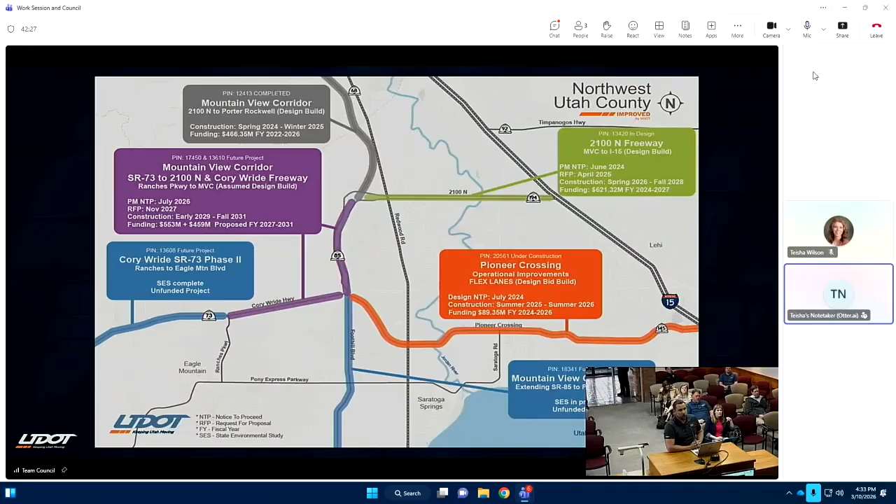For those of you that don't know, our program for Northwest Utah County consists of a series of projects. Some of you might know these very closely. The first one I'll speak to is the Mountain View Corridor project that we just finished in December. That project was from 2100 North up to Porter Rockwell. We were required to do that one first before we could start the freeway portions on Mountain View Corridor. We needed to make that connection. We were able to complete that project 4 months ahead of schedule and open it to the public right before Christmas. We're very excited to have that open and have that additional capacity between Salt Lake and Utah counties.

The next couple projects I'll speak to are 2100 North and Pioneer Crossing. Those are in our program, as well as the freeway portions of Cory Wride and Mountain View Corridor from 2100 down to SR 73. Future unfunded projects that will be part of our program are Mountain View Corridor South and Saratoga Springs, and Cory Wride Phase 2 out towards Eagle Mountain. Those are all freeway projects.

So as you can see on the map, we have several projects and a large investment in the area. The goal for our program, the Northwest Utah County program, is to provide that one-stop location for the public, council, or really anyone to find all the information on what's going on with these projects. So if you go to the website that's on the screen currently, you'll be able to drill down into any one of those projects to get additional details and schedule.

The first project we're going to highlight is Pioneer Crossing Flex Lanes project. I'm going to actually have my construction manager, Jeremy Bound, give an update on where this project's at and what's to come. Thank you.

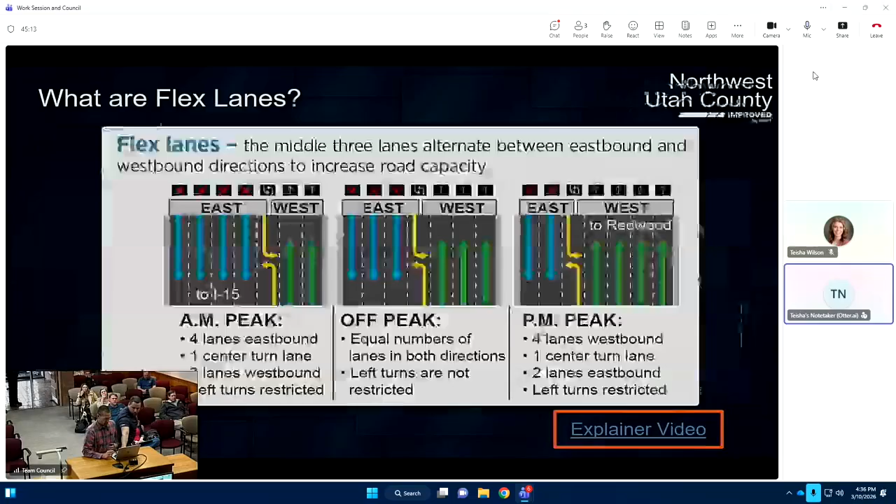Mayor, council, staff, Jeremy Bound with UDOT, Design and Construction Manager, part of the Northwest Utah County program team. So Pioneer Crossing, if you are in Lehi, you are probably aware of this and have seen it. We are under construction now and on schedule, looking to be able to, from Redwood Road to I-15, have the 3 lanes in each direction capacity later this spring, hoping May timeframe, and it's looking like the contractor is on schedule for that. Once we get that capacity built, we'll move to the next part of that project, which is adding the signals and such, so that we can do, as shown on the screen here, the flex lanes portion of that.

Schedule is to complete that portion of the project by the end of this year. So with that, we'll go from having 2 lanes in each direction currently to 3 lanes later this spring. Then with the flex lanes and those signals, we'll be able to shift during peak hours to 4 lanes in the peak direction and 2 lanes in the non-peak direction, then midday shift back to 3 and 3.

As shown on the screen here, I do have a video. I'm not sure it's going to work, so I probably won't jump over to that, but you can get it from the website that Andrew showed earlier if you want to see that video.

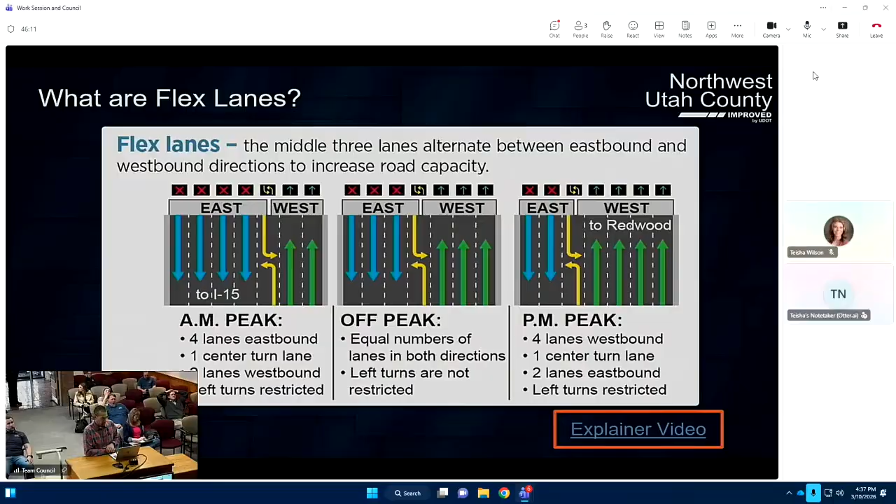As I said, the major improvement is the flex lane system between I-15 and Redwood Road. We'll also be adding additional westbound lanes between Redwood Road and the Mountain View corridor, so that in the evening when there's 4 lanes coming from I-15, it doesn't just go from 4 to 2 and continue to back up. There are actually lanes to capture that traffic and keep it moving through Lehi and off into the further west.

That project will start soon. We should be advertising for the contractor on that phase of the project in the next couple of weeks, and that one is also scheduled to complete by the end of the year. So all work on Pioneer Crossing should be complete by the fall of this year.

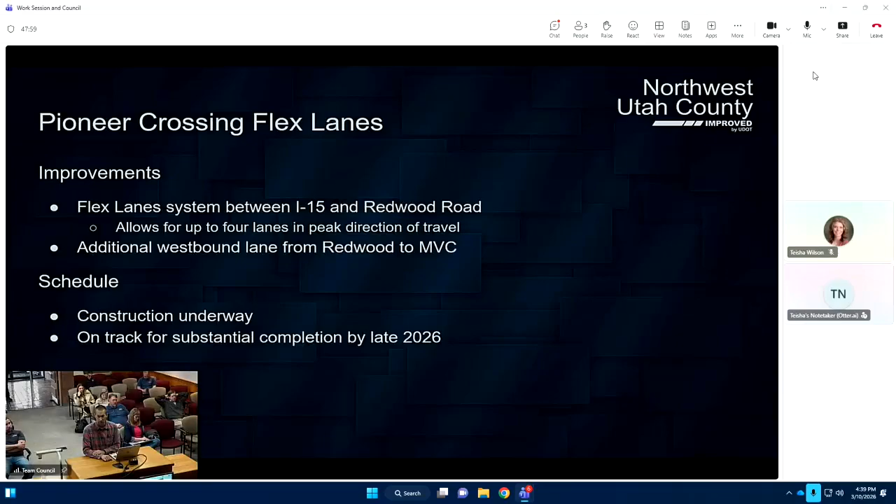Construction's underway and we're on track for that substantial completion. I'll give it back to Andrew for the rest of the update. Thank you.

The only thing I might add to what Jeremy said is the reason we went with the flex lanes concept is we're able to provide that capacity within the existing footprint of the existing corridor, and that's the largest benefit we could have. We're using the existing pavement out there. The contractor is actually recycling a lot of the concrete they've pulled out to install drainage, and recycling that back into the pavement section as well. So we're reusing a lot that's on that corridor, with minimal impact. We're not buying a lot of additional right-of-way or acquiring additional properties there. That's a huge win for us on this concept, and it really works well with the way traffic flows in this corridor.

Is there any questions on that real quick? Yeah, I have a question.

I see that the lanes look like they're going to go down. From what I understand from our streets department, a standard lane is 12 feet, and it looks like some of them say 11 to 12 feet. So I'm wondering what the speed limit is going to be, because from my understanding, with smaller lanes, it's typically a little bit of a lower speed, just to control the car.

What is your prediction? We are planning on reducing the speed limit on the corridor to account for there no longer being a shoulder on the edge and the reduced lane widths. So we are reducing that. Is it 40 or 45? We set the construction speed limit, but that speed limit will maintain once we're done at 40 miles an hour.

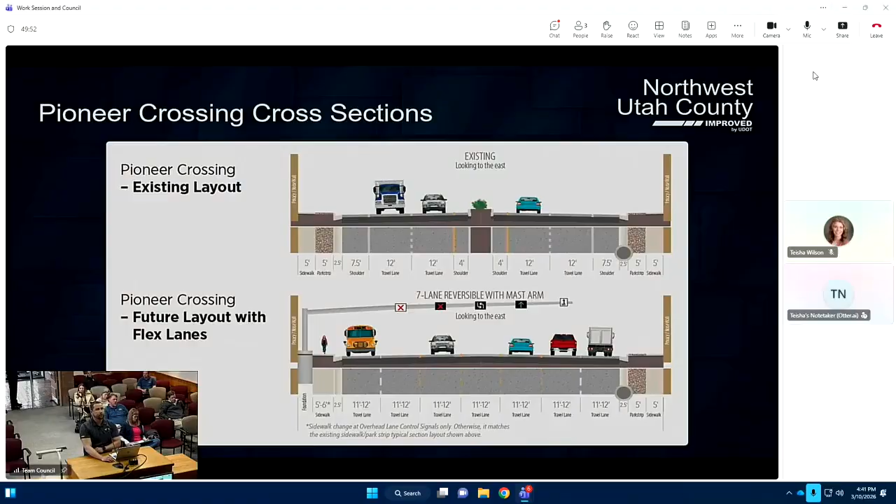Can you go back one slide? Here? Maybe one more.

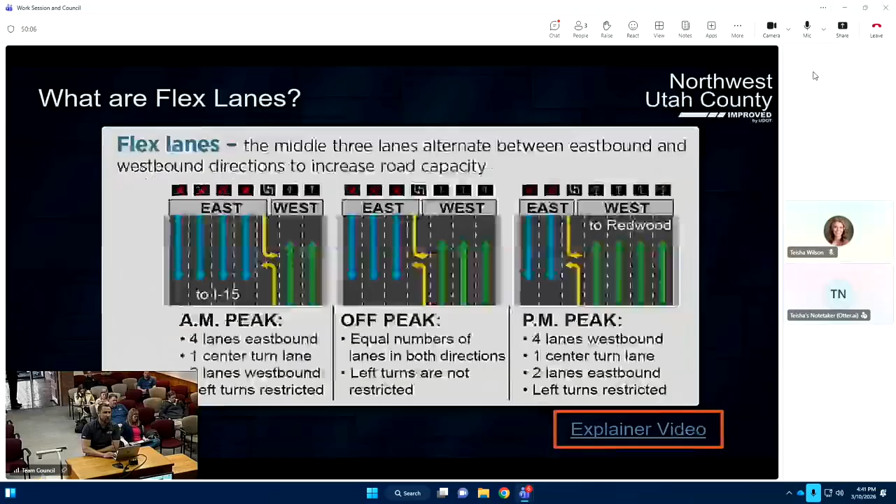So at what point, the one with the map showing, from Mill Pond Road to I-15, when is that planned to be modified? We will be modifying that as part of our project to line that up for the additional lanes, continuing that over to I-15. There will be some median modifications and right lane assignments getting ready to go into that flex lanes corridor.

And for the lighting, there's been some questions by the public on how dark it is, especially when it rains and everything reflects and you can't really see. What type of street lighting is going to be installed? Will it be LED, low profile, and will that be installed before those lanes open? A lot of the lighting infrastructure will be in line with the gantries we're putting in for the lane assignments, and that'll increase the lighting on the corridor. That'll all come online when we have that infrastructure in place.

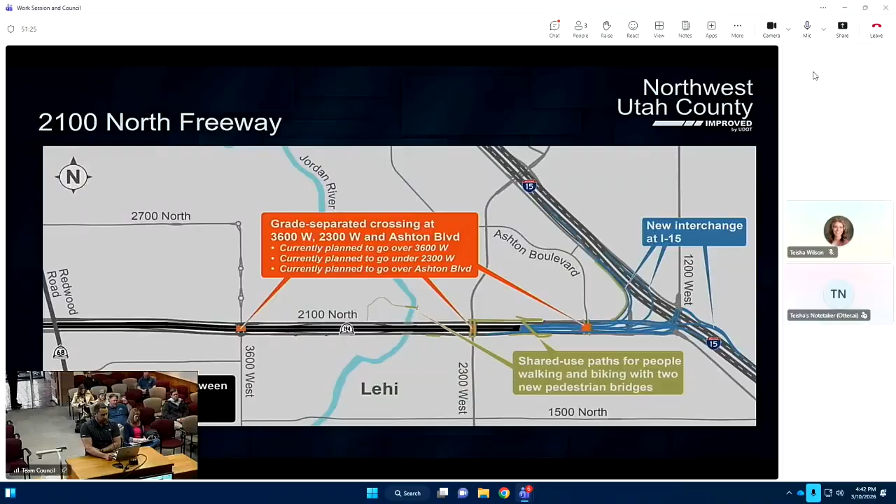Next, 2100 North Freeway. We're ready to roll. Our construction crews will be beginning some work along the corridor tonight, with some lane restrictions as we start making access into that median to prepare for work.

The first areas of work you'll see are near the river. We've got to do some work in there in preparation for the new freeway bridges crossing the river.

Before the increased flows happen in the Jordan River, we've been working in coordination with the River Authority to make sure that work is done so we're not impeding any flows from Utah Lake into the Jordan River and points north. So that's going to be a major coordination point with our contractors.

We'll also be starting to work on grading out that median area in preparation for the freeway. But yeah, work starting tonight.

So the concept for the 2100 North Freeway, you saw some of it that we completed in the Mountain View Corridor project, is lining that up for that freeway portion in the middle between the existing frontage roads. That'll continue where we left off, between Redwood and 3600.

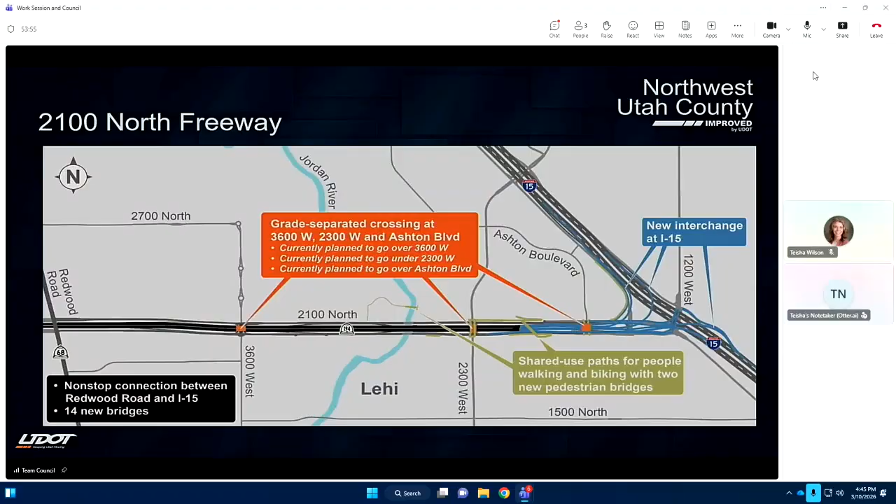There are two co-op agreements that we're looking for approval from the city on. The first one is a tri-party agreement between UDOT, Lehi City, and Utah County, in coordination with major stakeholders and the city. We will be constructing a trail connection from the future Holbrook Park, the city park behind the hospital, to the Jordan River Trail as part of our project.

This will be a pedestrian bridge that the city will own and maintain, but it provides a connection between the already heavily used Jordan River Trail corridor and the park facility, connecting across the river for those neighborhoods around the UTA station and over towards the hospital.

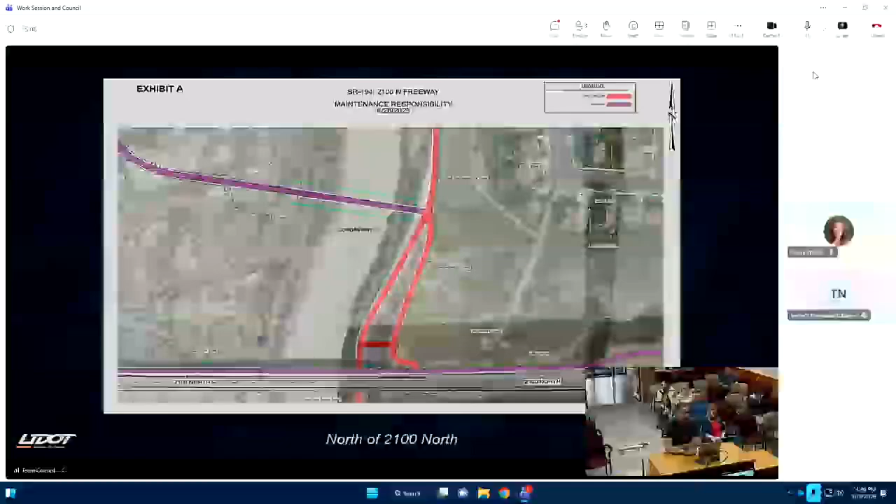We are also building, as a betterment, the trail through the park property for the city as part of our project. That covers the main points of that cooperative agreement. It's a tri-party agreement because there are connections between the Utah County Trail System, the Lehi Trail System, and UDOT right of way.

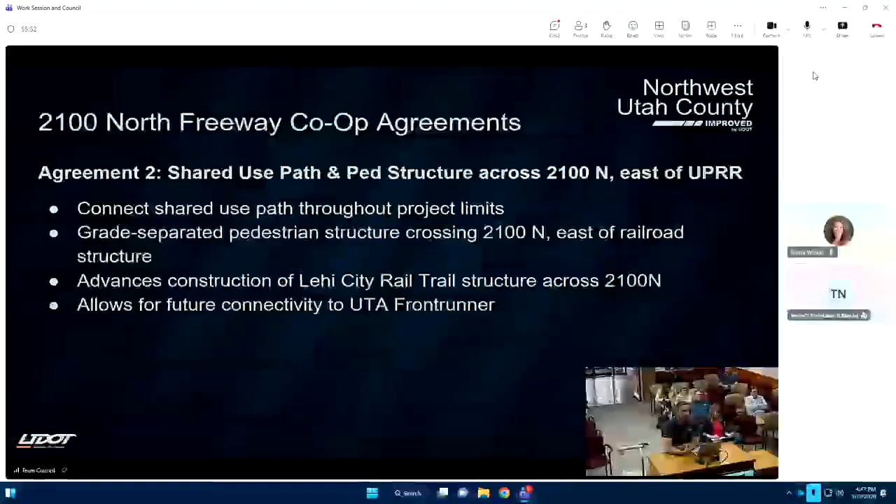The second agreement we're presenting is a co-op agreement for the rail trail bridge east of the UPRR tracks, in coordination with staff and the future project to bring that rail trail from the UTA station down into downtown. As part of our project, we're building that structure for the city.

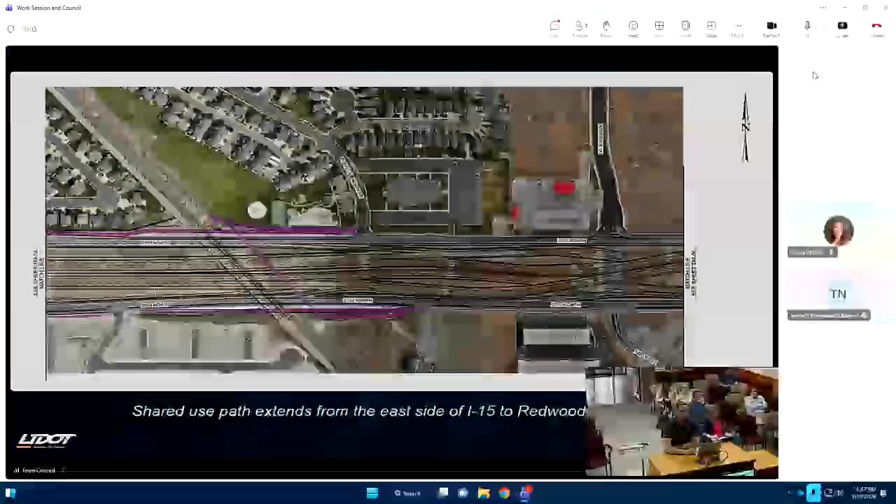Shown here, it connects from the skate park over to that south side and connects into that future improved trail. I believe the city has funding and is constructing improvements there in the coming years. So those are the two agreements, and some of the main coordination points we've done.

We've done a lot of work with major stakeholders in the area, the Garv properties, the Hadco property and access to their yard, as well as access in and out of the hospital. We've been working closely with the hospital to make sure that anything we do, even during construction, isn't impeding emergency services getting in and out, as well as flight coordination with the helicopters so that as we have cranes in the area, we have close coordination. They're aware of what we're doing, and we're aware of what they need from us.

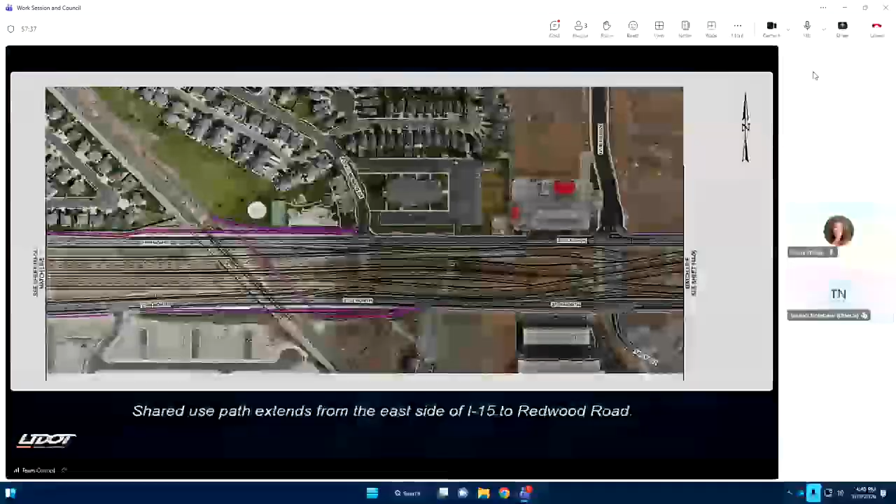So we're excited to start this project. General schedule, we're starting now, and we plan to have this completed by the end of 2028 — a 3-year project. There's a lot to do here, and we've been working closely with staff. I've got to commend the Lehi City staff for their coordination with us and their willingness to work with us on a lot of things. It's been a great partnership, and we wish to continue it over the next couple of years.

Upcoming for our program, we do have a funded project that we'll start as soon as we finish 2100 North, and that will be the Cory Wride and Mountain View Corridor freeways. We will continue from 2100 North down to 73, build a system interchange at 73 and Pioneer and Mountain View, and then continue that freeway and frontage roads out to Eagle Mountain, which will help pull a lot of that regional traffic out of the local systems and into a freeway system, vastly different than what we're experiencing today.

If you have any questions or would like to stay up to date, please visit our websites, and there's also the Facebook group where we'll be posting construction updates, lane closure updates, and really anything you need — you should be able to get it between those two sites. So if there are any questions, I'd be happy to answer.

I've been told you're redesigning the interchange between 2100 North and I-15. Is that correct? Yep. Okay, as part of that, are you going to reevaluate the sound study? Yes. The noise study we completed during our environmental reevaluation was based on the concept we had at the time, but our contractor, selected based on best value, has a slightly different design for that interchange.

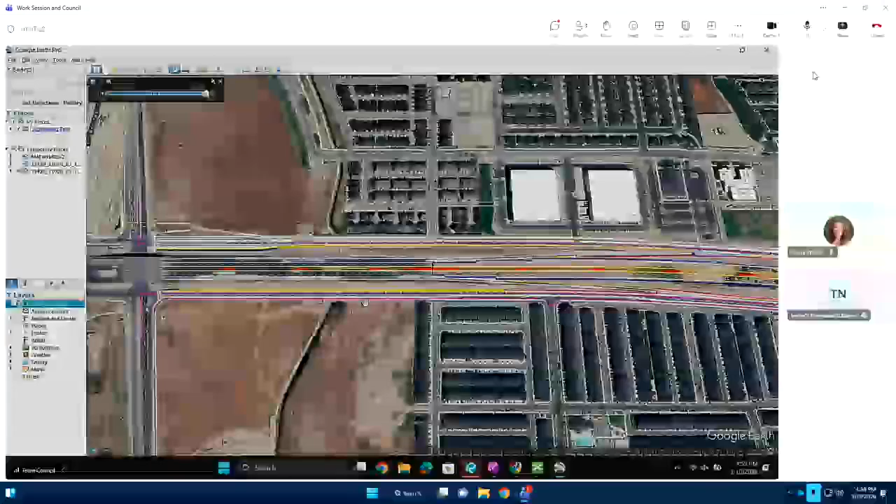This is your connection now back to the frontage road, and those will stay in place as ramps, but we'll build the freeway down the middle. This is 3600 West.

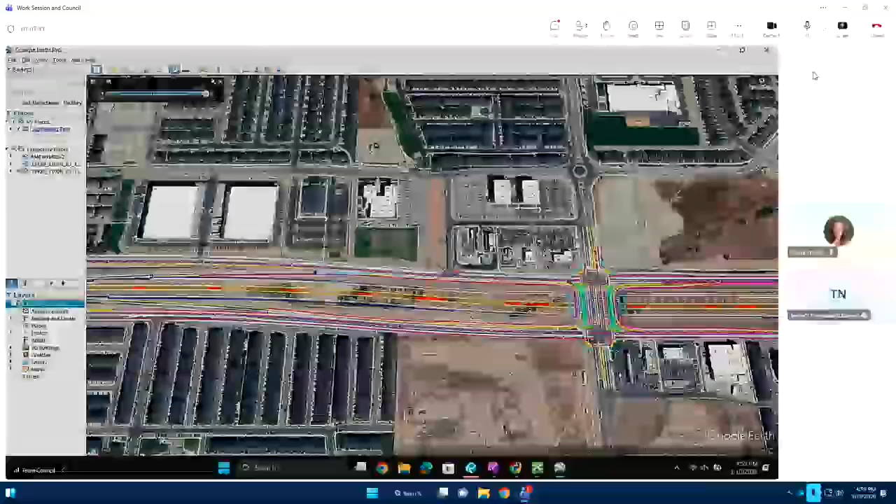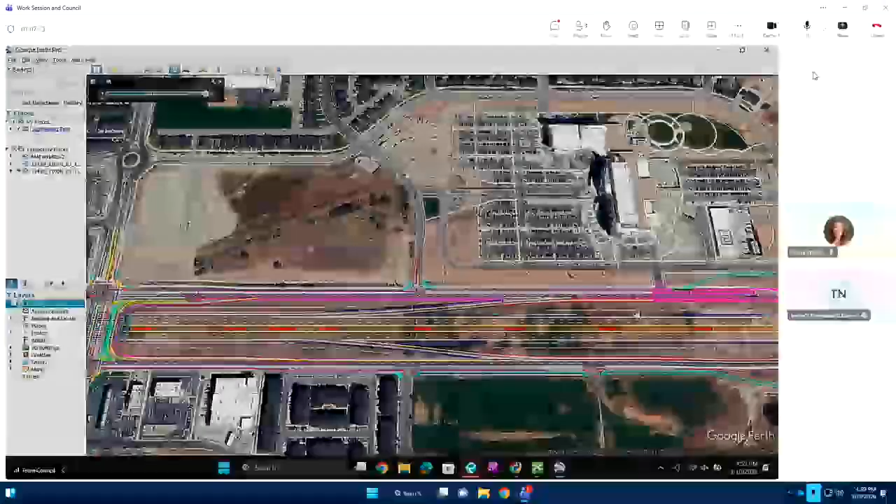And then you'll have an exit ramp here to go to 2300 West going eastbound. Going westbound, you'll have an on-ramp to get onto the freeway from the frontage road.

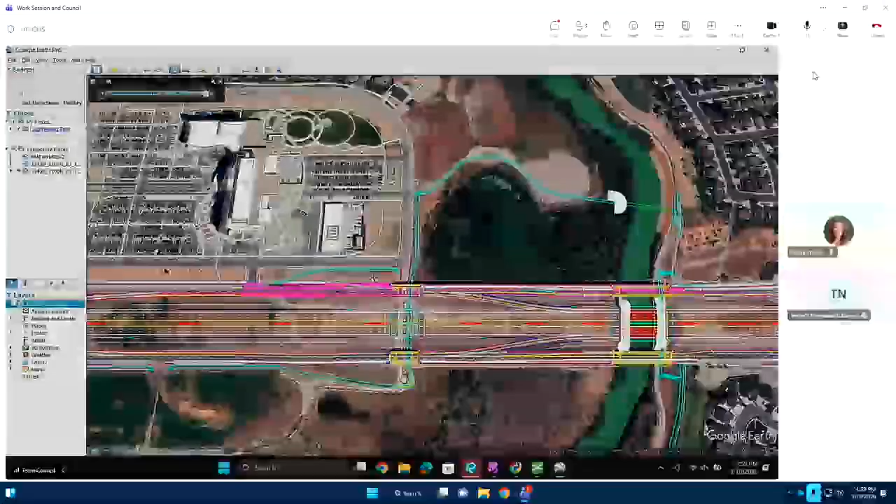And then these are the ramps between Waterbury. This is the grade separation at Waterbury. And then the river, there'll be these slip ramps here.

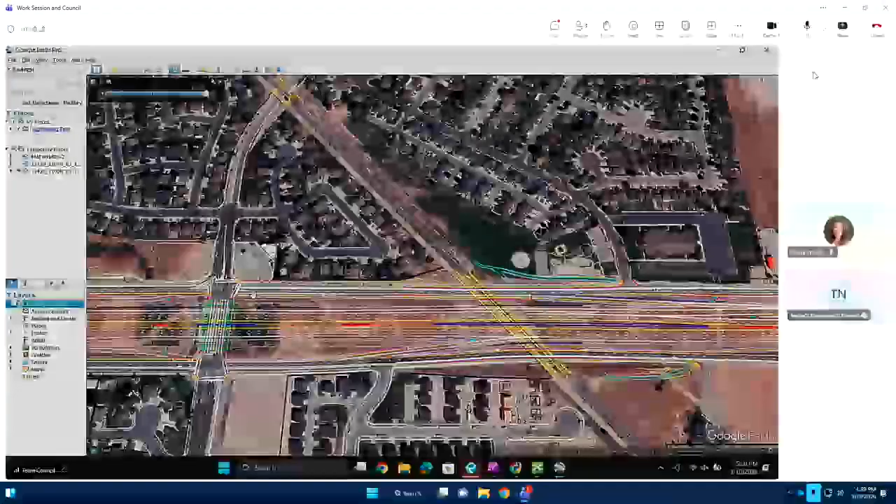And then you have 2300 West right here. Again, you've got an on-ramp right there that gets you onto the freeway part, and then an off-ramp gets you off to access 2300 West. And then here's the full system interchange, full grade separation at Ashton Boulevard, and then the direct freeway to freeway flyover ramps that access I-15.

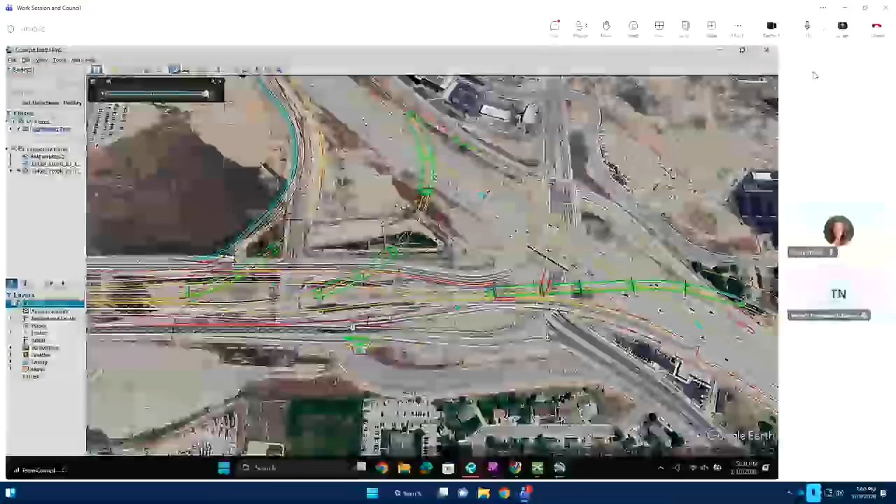So for the entrance into Hadco, is that going to be pretty seamless? Because I know before they were worried they'd have to go down and flip a U-turn, right? Yeah, and ideally they can just slip right into their property.

Is that on track? Yeah, with the new interchange design here, this will basically be access as it exists today at Ashton.

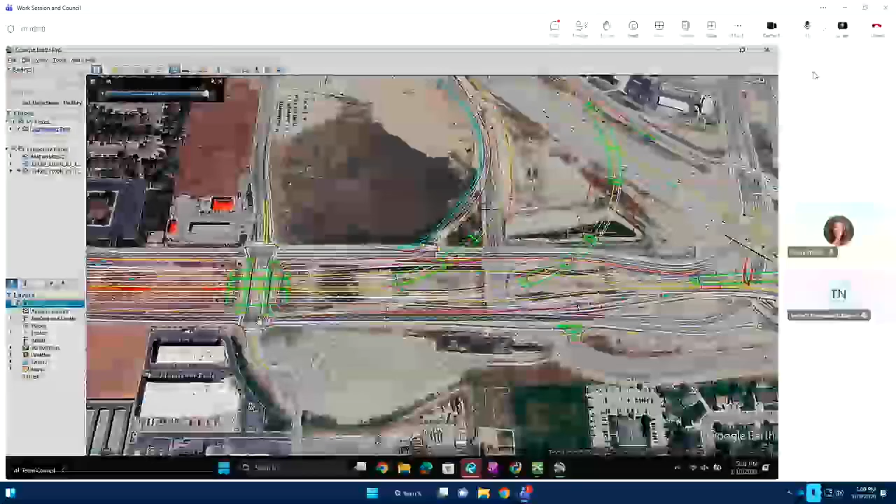Thank you. I live in Holbrook Farms. We're so excited, so thank you so much. Any other questions? Thank you. We appreciate it, thank you very much.

Okay, item 2, Civic Center art installation discussion. Mr. Steve. Okay, now we can talk about fun stuff.

So as we started building the Civic Center, we started talking about art and how we're going to make this more than just a city hall, more than just a library, and make it a place that people want to come. We've done several different options, as you guys have seen. We have the community spaces, we have a lot of pretty areas. We want to make this an inviting building.

So when we started down the art path, we hired a consultant through Heritage Arts Foundation. They work out of Alpine Arts Center, in connection with one of the sculptors who's done several things for us in the city, the Infant Cemetery Monument, as well as one of the monuments over here at the Legacy Center. We walked them through the building and said, okay, these are the spaces we would like to fill, these are the things we'd like to see. Understand that we want mostly local artists in the building, people that mean something to our area and to Lehi. And in doing that, they've done a great job so far.

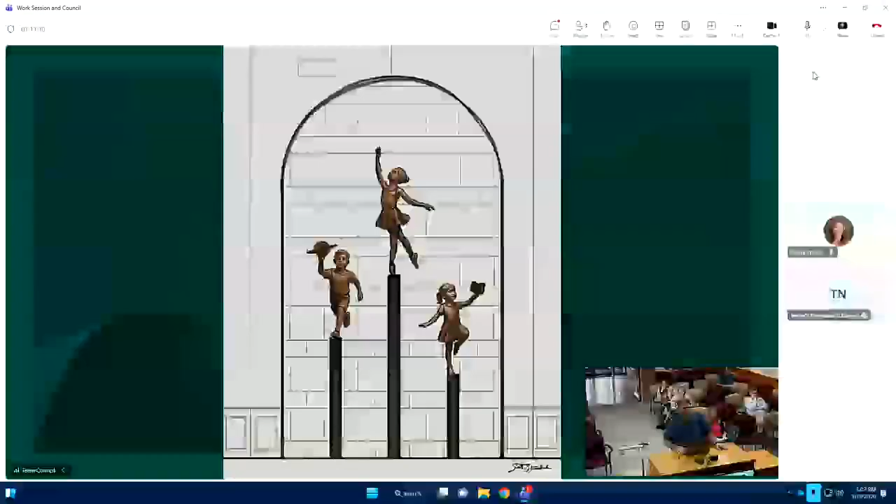We've got a lot of the art going in. But this area you see on my screen is the main foyer. Right as you come in, we've got this great big wall. The sculptor is the one we've got these concepts from. His name's Scott Streadbeck, and he's done a lot of different work for us, so we've got a good relationship with him and the city. So he said, hey, let me take a stab at a couple different ideas for you. And these are some of the ideas he's brought back to us.

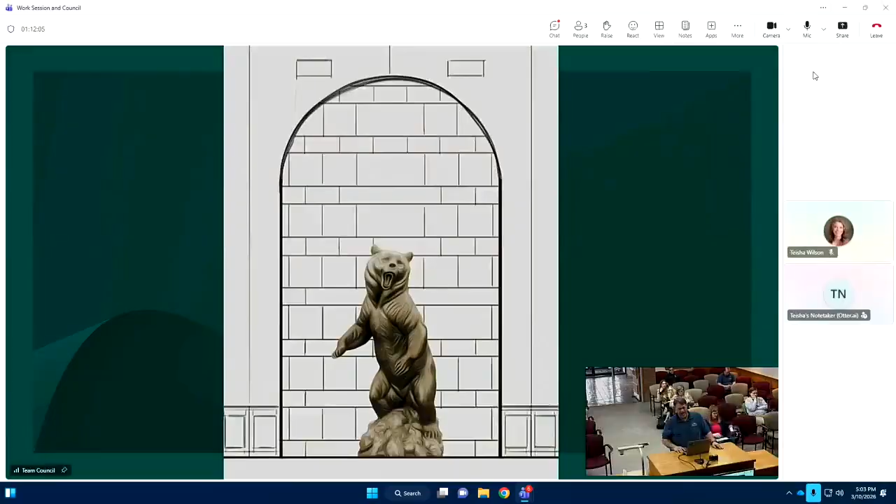And I don't read in public, so bear with me. At the heart of Lehi's new City Hall and Library stands a soaring 15 to 20-foot work of bronze set inside the building's grand central tower and lobby. The piece will not just simply decorate the space, it will embody the spirit of Lehi itself, just as the tower anchoring the civic presence of the building. The central sculpture presents the living tree rising upward with quiet strength, its trunk anchored deeply, the branches reaching wide and welcoming. The scene invites reflection, to pause, breathe, and remember who we are.

At the base of the tree, two youths sit together in conversation. Their posture expresses not only belonging, but also the idea that every new generation finds wisdom and grounds itself in the stories that came before. Sorry, I was trying to scroll down. Within the leafy canopy clusters, visitors can view subtle woven themes and reflection elements of Lehi's past, present, and future. The images will intentionally be understated, never dominating, never demanding attention, yet present for those who know what they're looking for.

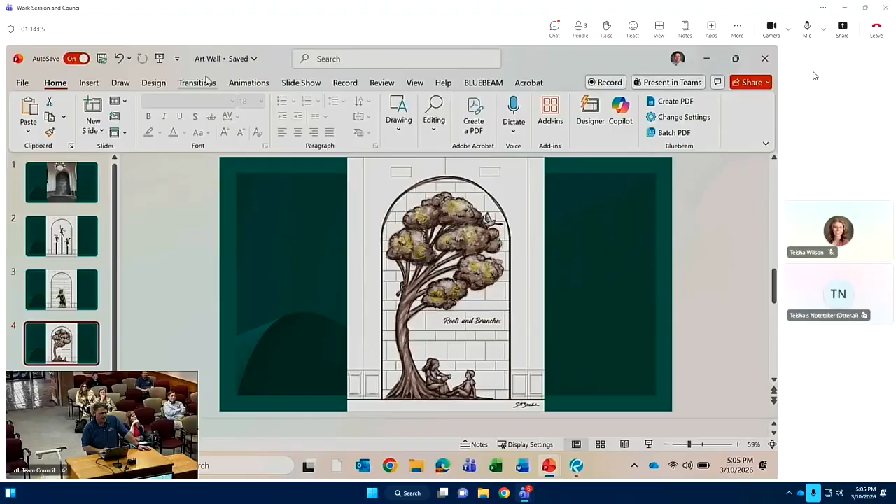As you zoom in, you can see a microchip in there. You can see library books. You can see an American flag in there. Up in the top left corner, you can see the emblem of a rodeo, of the rodeo themes. You can see some of those ideas.

So going back to it, I think what the overall ask and question for tonight and for this council is, we're down the road on this. If this is something you guys would like to pursue, we can continue down this road. If it's not, we can change direction. If you would like to see something completely different, or if you would like to see nothing at all, that's also an option.

For funding on this, the estimate is about $220,000 because it is a bronze relief. So basically it sticks out from the wall a foot or two up at the top, and then down at the base, the intent would be to have the children as full-size statues. And so it would come out into the breezeway 3 to 5 feet. But it has a very cool intent behind it and feel.

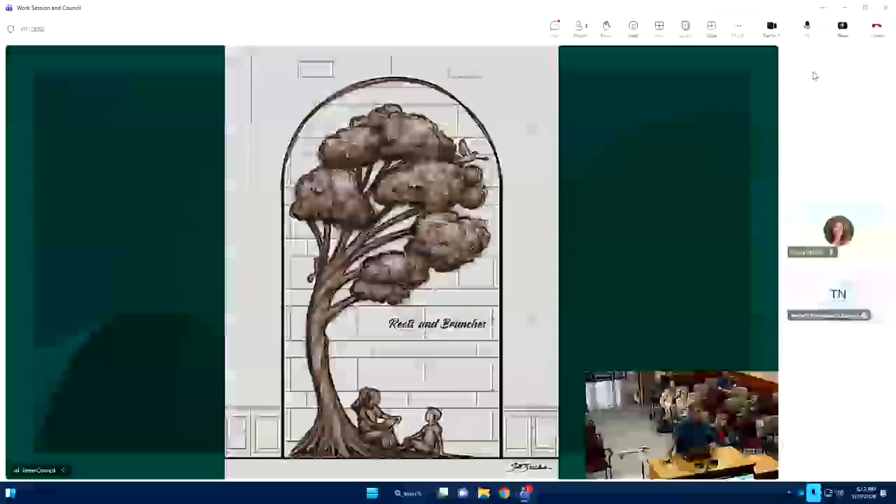Great. So there's no timeline on this at all. This is more or less something we'll be working on in the background, so if anything happens, I'll give you updates. If you're going to have a chip in there, you might be able to ask at least one company in Lehi - that company has already donated about, I think, six of them that are going into an art installation over there as well. Great, awesome, thank you Steve.